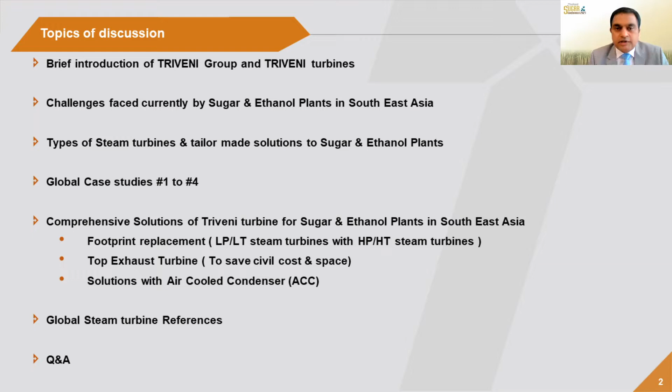So Triveni Group is a large diversified business conglomerate from India. It has 2 business entities: Triveni Engineering and Industries Limited and Triveni Turbines. This group is over 50 years old in the business. Talking about Triveni Engineering, the most interesting aspect is that it is also a large sugar manufacturer in India. It has 7 sugar mills and a total crushing capacity of over 61,000 TCD.

It has its own 2 modern distilleries, and it also produces captive power of about 105 megawatts from 6 power plants from these sugar and ethanol plants. So that is the reason in India and globally, we are recognized in the sugar and ethanol business. So when it comes to the sugar process or steam turbines, we understand both completely, so we are able to produce very tailor-made solutions for this industry.

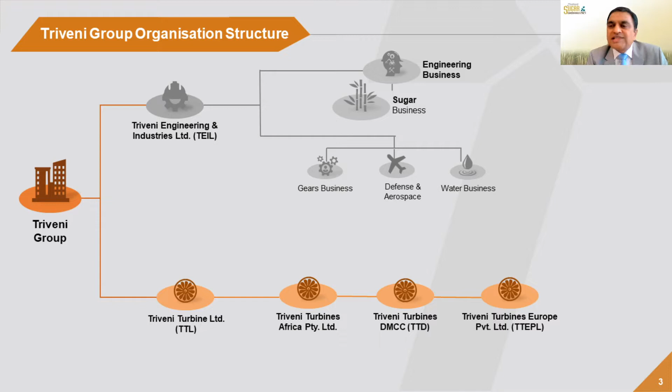To give a snapshot of Triveni Turbines Limited, over the 50 years in business, we have a footprint in over 70 countries and have installed over 5,000 steam turbines across various segments. In India, we have over 60% market share, that too for more than 10 years. Globally, we have more than 34% market share in the segment of 5 to 30 megawatts, which is predominantly the size sugar and ethanol plants operate in, where they need steam turbines.

We have 2 state-of-the-art manufacturing facilities and a capability to manufacture over 200 steam turbines annually, and both are upgraded to Industry 4.0 and are world-class facilities. We are one of the very few OEM companies in steam turbine technology where every steam turbine is tested with live steam in the factory, and all the simulations and testing are done before the turbine is sent out. That is one of the biggest advantages our customers get from us globally.

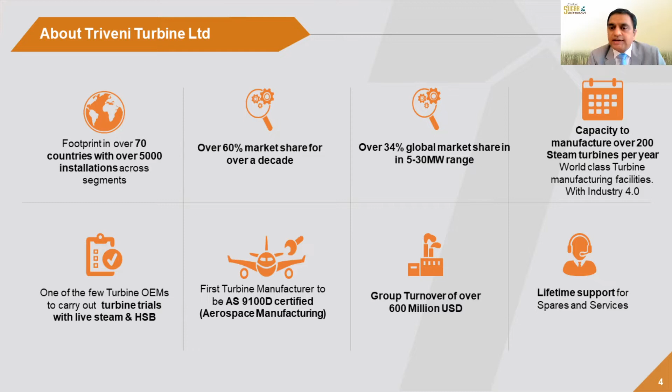We are also the first steam turbine manufacturer to be accredited with AS9100D, which is a very high standard over and above ISO standards for manufacturing, and it relates to the levels of aerospace manufacturing technology. And as you can see, we are a large group with large turnover and a lifetime of spares and support provided.

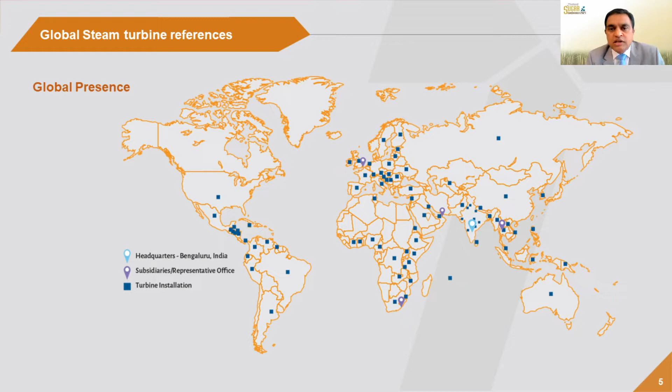How we do this is with a very strong design and development infrastructure in-house. Triveni has very experienced thermal, structural, and aero domain experts who are able to design steam turbines with very high efficiency and a longer life, while at the same time reducing unnecessary costs to make the steam turbine very cost effective.

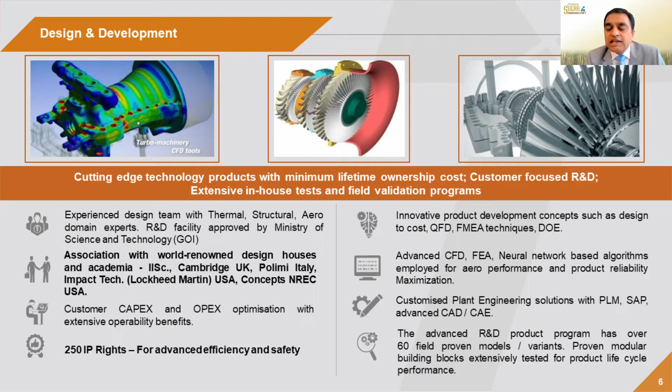As you can see, we are associated with a number of world-renowned academia like the Indian Institute of Science, Cambridge in the UK, Polimi in Italy, Impact Tech, which is a part of Lockheed Martin Group in the USA, and Concepts NREC in the USA. So with continuous tie-up and upgradation, we are able to provide steam turbines with the best efficiency in class, the longest life and minimum downtime.

So I will directly dive into the challenges that today we are facing in Southeast Asia and also in Thailand, which is every company, sugar company or ethanol company, they are desiring to operate at their peak efficiency, right? So there is a need for higher steam efficiency, leading to lower steam consumption in the turbines and eventually in lower fuel consumption in the boilers.

If you look at the age of the sugar mills across Thailand or Southeast Asia, several of these sugar mills are decades old and they are using older low pressure boilers, which are operating at a pressure as low as even 20 bar and lower steam temperature. If you use such boilers, the heat content or enthalpy content of such steam is quite less, and the specific volume of the steam is quite large. This leads to a steam turbine which is much bigger in size, and because of the enthalpy not being the highest, you do not get the best steam efficiency.

Number two, since the plants are older plants, you are also having a set of old steam turbines operating there, which are older in technology, using old design of the blades, old design of the steam path, and such steam turbines will continue to have a higher specific steam consumption. This is the term that is used to say how much steam is consumed per megawatt of power produced, right? So once there is a higher specific steam consumption, you're using a lot of steam to generate just 1 megawatt of power. This leads to higher fuel consumption at the boiler.

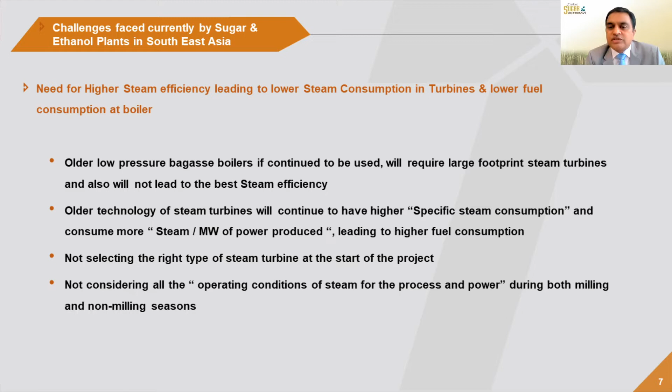And lastly, not considering all the operating conditions for the process steam and for power during milling and non-milling. As everybody knows, sugar is a seasonal product. So in Thailand, the sugar crushing and sugar production happens for a period of 5 months, and another 7 months is called the non-milling season. It could vary depending on the sugarcane availability. So every company has to consider these factors when they want to invest in a new boiler and new steam turbine project.

Now, how can Triveni help to overcome these challenges? This is the topic of discussion today. Very interesting topic and very relevant in today's times, because as I mentioned, the world is moving towards greener, lower carbon footprints. Everybody would like to save as much energy as possible and be as efficient and productive as possible. So we will help to improve the steam efficiency, leading to lower steam consumption in the turbine and eventually lower fuel consumption at the boilers.

Ladies and gentlemen, as you can note, newer projects are coming with higher pressure and higher temperature bagasse boilers. This is the trend globally now, right? You can see that boilers are designed for 105 or 110 bar pressure and 530, 535 degrees centigrade temperature. This is exactly one way to reduce carbon footprint, to reduce the fuel consumption, because with the higher enthalpy content of such steam, we will require lower steam consumption in the turbines, and it will also lead to the best steam efficiency. Triveni has a product range where we can supply steam turbines operating up to 140 bar pressure and up to 545 degrees centigrade.

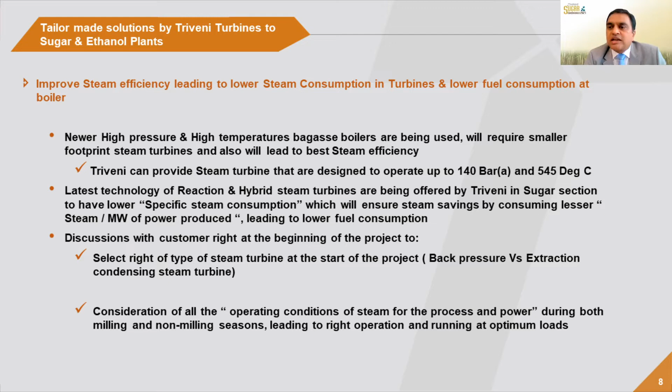We, being a sugar manufacturer, understand the sugar and ethanol process very well. And that's the reason when you discuss with us at the beginning of the project, we are able to suggest several optimizations and improvements and how to select the right type of steam turbine at the start of the project. How to optimize the capital cost, how to optimize the operating cost, and also we are able to give all sorts of considerations of the milling and non-milling season operations, and this helps the owners to decide accurately about their requirement.

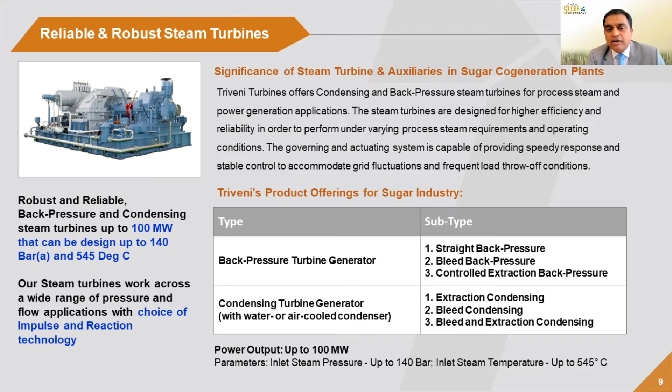So if you look at the product range that we are having, both in back pressure as well as in condensing steam turbines, we are able to offer every type of steam turbine that is required by the sugar and ethanol plant. And as I mentioned, we can go right up to 100 megawatt as Triveni's portfolio, and we can design those turbines up to 140 bar and 545 degrees C.

As I discussed with you, we will substantiate or support these claims by a few case studies. This is case study number 1. It's a bagasse-based cogeneration plant installed overseas by Triveni, and it is operating a 24 megawatt extraction condensing steam turbine at an inlet steam pressure of 85 bars and 525 degrees centigrade. Let me share with you, this is a very prestigious customer in Australia. It is part of Mitr Phol Sugar Group of Thailand. It's a very prestigious installation for Triveni.

So here the challenge is, this is another improvement that's coming nowadays in modern sugar and ethanol plants, where they want to have the plants running with the least number of manpower. So highly automated plants operating continuously and automatically, even including the steam turbine. So the customer requirement was to deliver the maximum efficiency and installation in a compact space. They wanted all the electrical panels to meet the local Australian standards.

And the solution that Triveni provided was a reaction technology steam turbine, which offers a very, very highly reliable and efficient design, and also caters to various part loads. As I discussed, part load is something that needs to be discussed right up front with the owners, with the process operators, about how the plant will behave, whether it will run at peak load or there will be part load conditions.

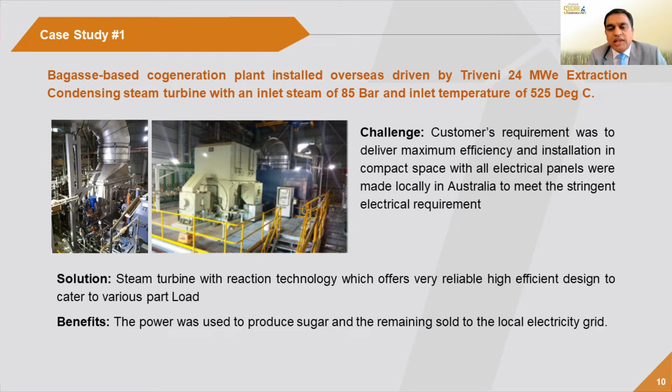I'm coming to case study number 2 in India. I talked about this in previous slides, where higher pressure bagasse boilers are being used, typically 105 bar, 110 bar, and a steam temperature of about 530 to 535 degrees. So this is a case study where we supplied a 27 megawatt back pressure steam turbine with these design conditions, 105 bar and 535 degrees, and a 3 bar exhaust pressure to the process.

Now here, the challenge was the customer's requirement for high inlet steam parameters, as I mentioned, a higher efficiency steam turbine, and a delivery expectation of about 8 months. As I discussed with you, we are able to meet challenging conditions on design, delivery, and capital expenditure. And we were able to meet this customer's requirement by again providing a reaction technology steam turbine, which was installed in time. The steam path was designed, of course, to handle this higher pressure and temperature.

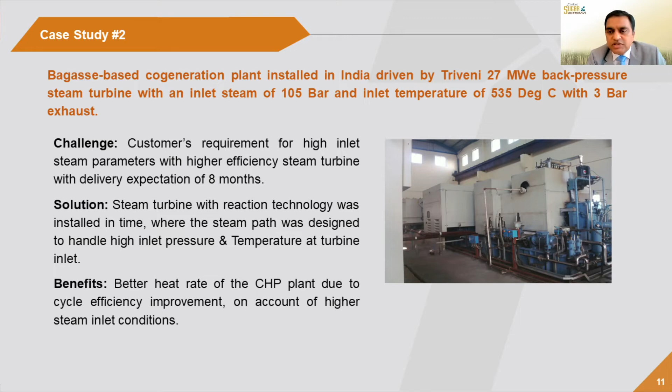And the benefit that the customer derived was a better heat rate in this combined heating and power plant due to the cycle efficiency improvement. Anybody who moves from a lower pressure and lower temperature cycle to a moderate, medium, or even to the higher pressure, higher temperature steam cycle will definitely derive the same benefits.

Case study number 3, another case of a turbine installed in Vietnam for a 30 megawatt back pressure steam turbine. Again, here you can see the pressure is in the moderate or medium range, about 65 bar, and temperature is 500 degrees. Same requirement, higher efficiency steam turbine, and delivery expectation of about 7 months.

So a solution was offered by Triveni with the reaction technology, as I mentioned to you. And you can please go through this aspect of higher or larger volumetric steam flow rate. I already discussed this. When the steam pressure is reducing or a lower generation at the boiler, the volume of the steam increases considerably and a larger turbine has to be offered. Okay. And we were able to offer this in a single cast exterior casing, which was also provided with the guide blade carriers for faster startup and for better efficiency.

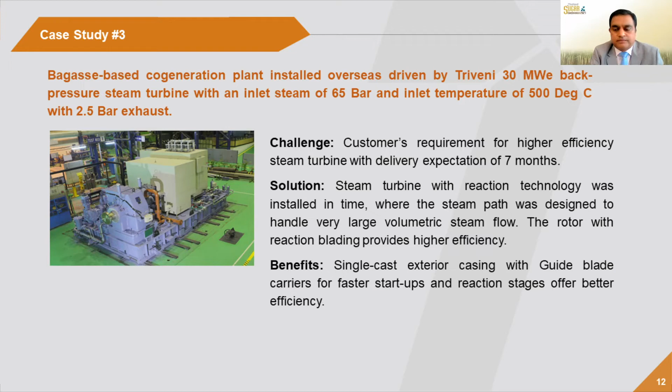We move on to our last case study number 4. This is a bagasse-based cogeneration plant installed overseas by Triveni and having 2 x 16.5 back pressure steam turbines. Here, the inlet steam pressure is 42 bar and inlet temperature of around 400 degrees. Now, ladies and gentlemen, please see the challenge here, where the customer requirement was to deliver the maximum efficiency and a turbine which can operate at 2 inlet conditions of 42 bar from the new boiler and also cater to 21 bar from the existing boiler.

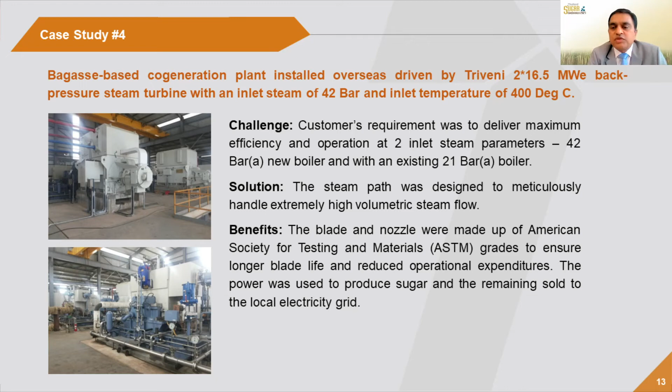So I repeat that we are able to provide tailor-made solutions, not just standard off-the-shelf solutions, but very, very tailor-made solutions, customized solutions for each and every requirement. And that's exactly what was done. The steam path was designed to handle the extremely different volumetric flows, catering to these two pressures, 42 bar and 21 bar. The benefits, the blades and nozzles were made of very, very high grade ASTM steels to ensure the longer blade life and reduce the operational expenditures. And of course, the power was used to produce sugar, and also the remaining was sold to the local electricity grid. So there are many such case studies which are varied, but we can discuss individually at an appropriate time.

So as I was discussing with you, one of the best ways is to replace your existing or very, very old legacy steam turbines, which are operating with the low pressure, low temperature, with a very, very high efficient and reliable turbine, which can be designed for high pressure, high temperature. So normally this is happening at two places. One is in the new greenfield projects. Definitely this is being seen where the new boiler is being put up with this condition. And also in brownfield expansion projects, where there is a modification in the boiler or again changes in boiler leading to the steam condition being upgraded.

Now, if you quickly see the benefits customers get from this kind of a change, you get an efficient and reliable turbine on the same foundation deck. This is very important because no customer is interested to change their foundation again when they are changing the turbine. We ensure that we use the same existing foundation when we are making this change. It leads to a huge capex saving, and the customer derives a lifetime of steam and fuel savings. And we do this changeover, the supply installation, with a very, very minimal or nil downtime, all done during the non-milling season. And lastly, we will utilize all the existing equipment that can be reused, maybe the generators, the electrical panels, all the systems that can be reused. And we have done several such projects, and the customer benefits from the changeover.

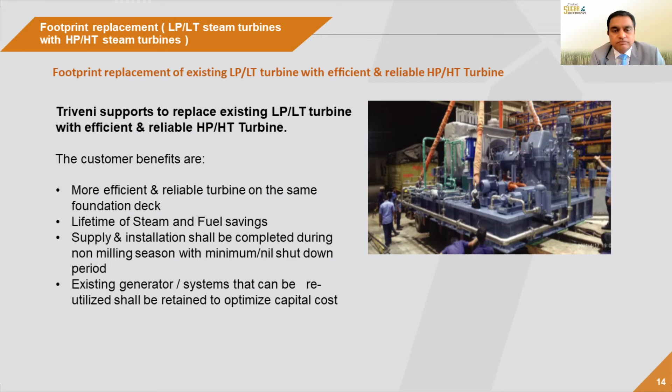Now, another part of the comprehensive solutions for steam turbines that we are supplying globally is the steam turbine with exhaust at the top. We call it a top exhaust turbine. This predominantly helps to save the civil cost and the space. As you can note, traditionally steam turbines would be placed on an above floor, and the water-cooled condenser would be placed right below the turbine, leading to a very, very high civil building design and a higher civil cost. But now we have totally done away with that. We are providing steam turbines which can be put on the ground floor, and the water-cooled condenser can be placed right next to the steam turbine. This is connected with the top exhaust crossover duct, which is also provided as a part of the solution, leading to a lesser footprint, lesser civil cost, and a lot of savings to the customer.

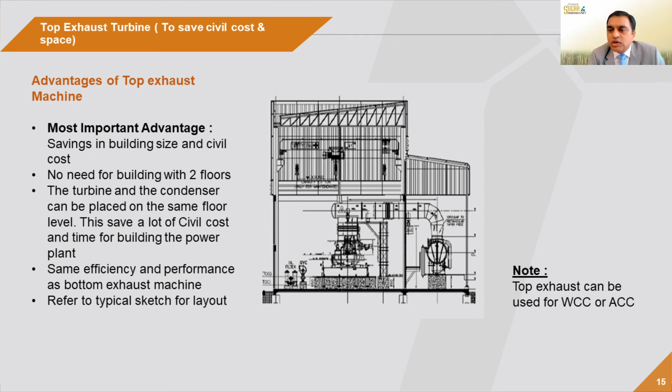As in this picture, you can see that it is connected to a water-cooled condenser, but we can connect the same steam turbine in the same fashion to an air-cooled condenser. Which brings me to the next topic about air-cooled condensers. As you can see, a change in the industry.

There are a lot of talks happening about water conservation and water savings and water non-availability in certain parts of the country. We talked about drought situations earlier, and there are many regulations coming up in many countries where you cannot use or discharge water, which leads to newer projects requiring air-cooled condensers, because the advantages are it does not need water as the cooling medium. This is number one. It's easy to use where there is no water source or scarce water source, and there is no need for a cooling tower or expensive water treatment chemicals.

Of course, there are a few disadvantages too. Like with anything, there are advantages, there will be disadvantages. So the cost of the ACC is more expensive, and also the space it requires is quite larger. And also there are some efficiency and other aspects that need to be considered between water cooled and air cooled.

Nevertheless, we have over 100 projects working globally where we supplied our steam turbines with ACC, and we will be able to do the same for any new project in Thailand or existing projects where they want to change the water cooled condenser to air cooled condenser, because it's not a simple changeover of just an equipment. You are not just swapping the equipment. There is a lot of change in the operational philosophy, how the turbine and ACC will operate and coexist. So there are a lot of changeovers that need to be done. We will be able to provide this also as a part of our comprehensive solution to the Thailand sugar and ethanol industry.

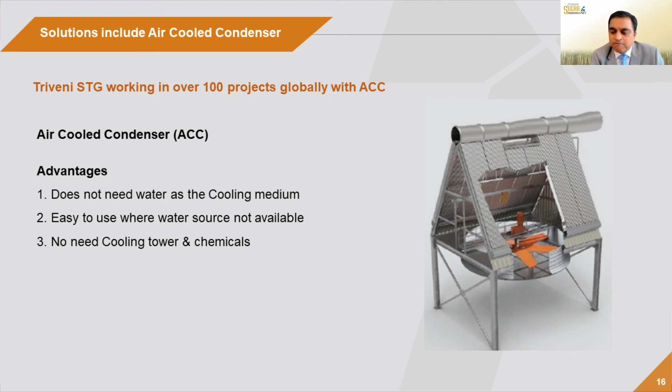We have supplied two numbers of 25 megawatt turbines to Kaset Thai Group, KTIS Group. We have supplied steam turbines to the TRR Group. We have supplied to Prachuap Sugar. We are in the process of supplying to many other sugar mills in Thailand. And we do hope that with this talk that we have given, where we are able to improve your existing plant performance, we will be getting a lot of response where we can support your individual needs.